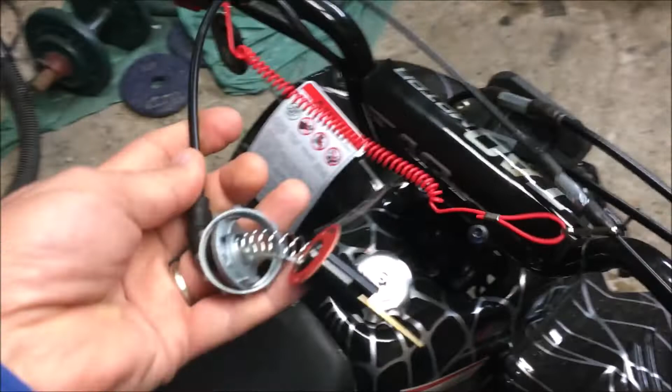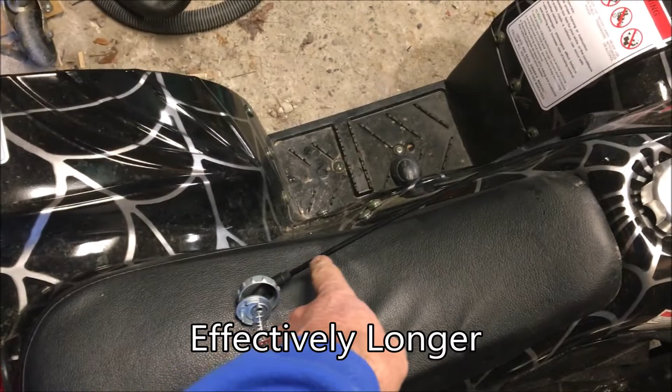Okay, so new direction on the throttle cable. We are going to lengthen this cable, the original cable. We're going to lengthen the inside part, the effective inside part of the cable. So we're going to basically decrease the length of the sheath, right? And so the inside cable will remain the same length, therefore it will be slightly longer. Okay, so that's what we're going to do.

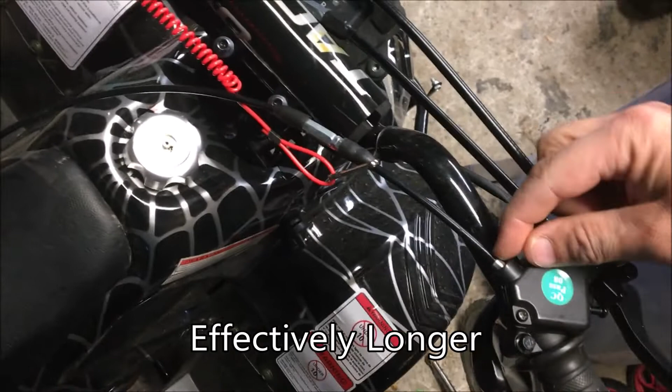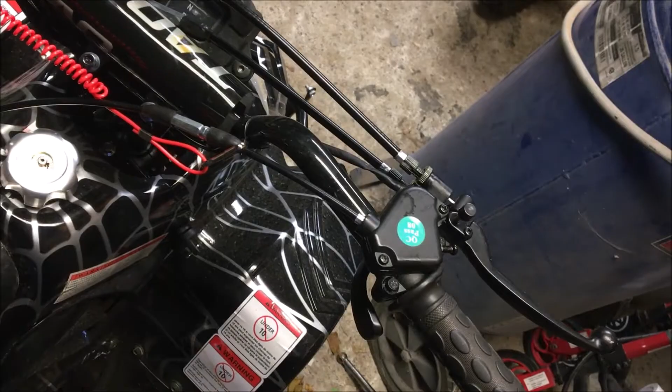And we'll do that over here. We'll cut off the ball on this side, and then we'll have to remake that ball. So we'll just cut a little bit of the sheathing. We're going to see how much adjustment we have here, and we're going to lengthen it about half the length of the adjustment that we have. Okay, that's what we're going to do. That's going to be my rule of thumb.

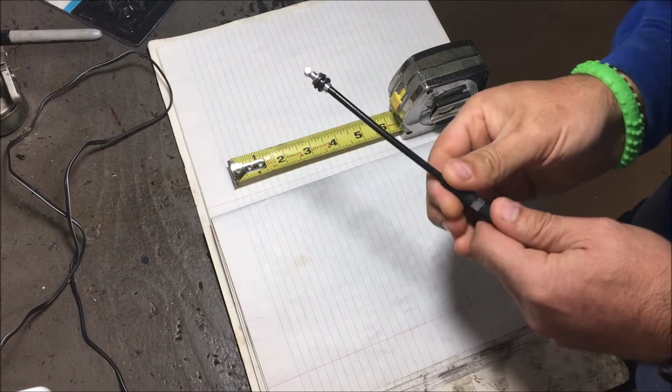Okay, so this is what I mean about lengthening the cable. You have the cable here, we have your adjustment here, which is your only adjustment on the cable. So you go like this and you can adjust the cable, right? You unscrew it, then you double nut it, you lock it there, and that's the adjustment.

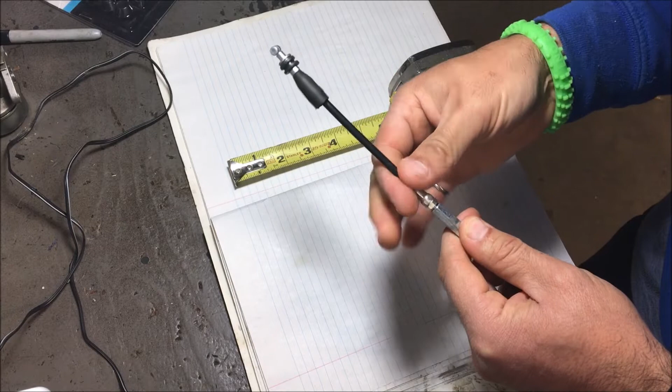So here we pull this out and we can see how long it is. We want this longer because right now it's pulling up the throttle. So right now it is, we'll measure it.

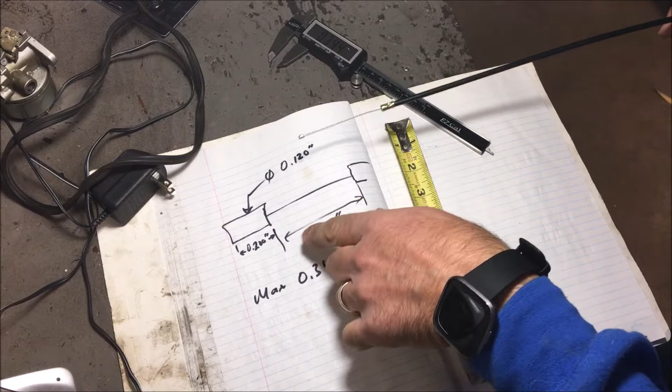So we have the little piece here, and basically its diameter is 120 thou. The length of it is 200 thou, right? Then there's the cable part, which is actually 3 inches, 3.3 inches basically, right?

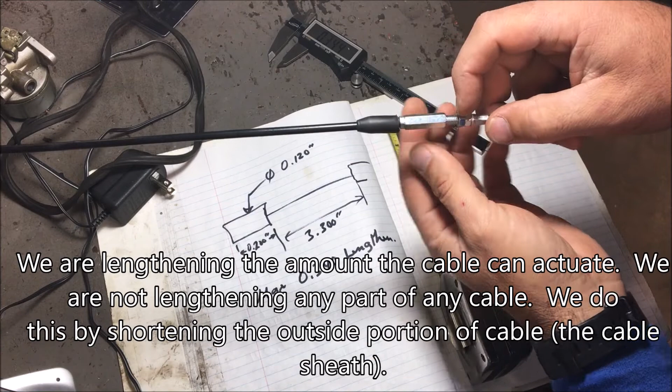From there to there, and we are going to lengthen, as I said. So this is your adjustment here. I backed it off as much as I want to back it off. So if I were to bring it to 0 once I lengthen it, I would just back it off to this point here and then just lock it, and then I'd be at the same point where I am, right? But now, then I have all this adjustment, right?

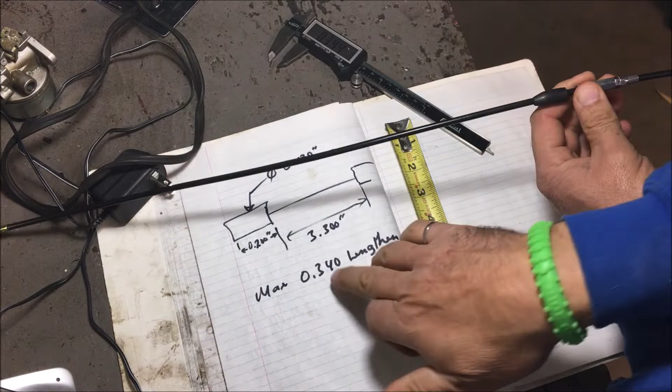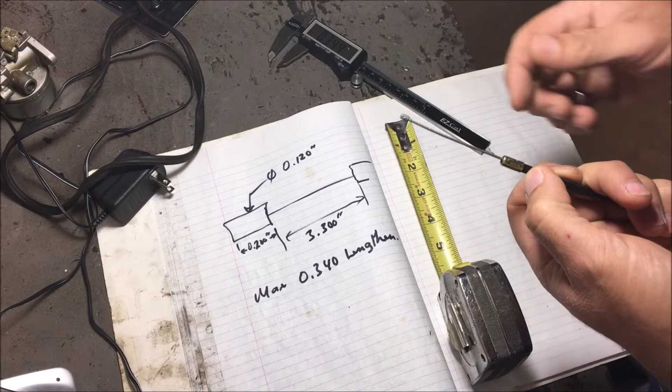See, I'm screwing that in to make it actually longer by, let's go 340 thou. Right, so to do that, we're gonna cut 340 thou from here. Obviously we don't want to cut this. Oh, we have to also include this piece here. So we have to cut 340 plus the 0.2, which is basically half an inch, right, basically 0.54 inches. From here, we gotta first remove this. So first step, remove this. Let's do that.

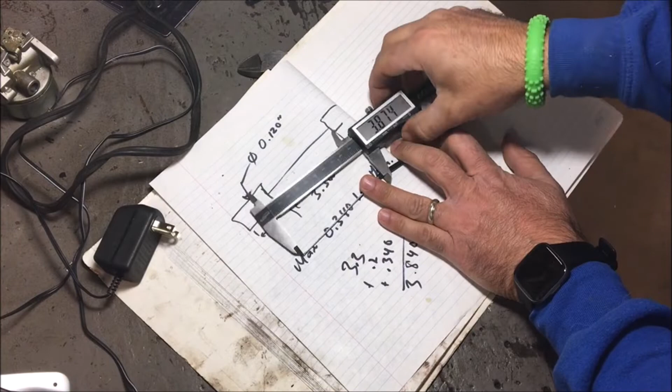So we should get 3.84. We got that. Good enough, good enough. Okay, all we gotta do now is recreate the little bulb there.

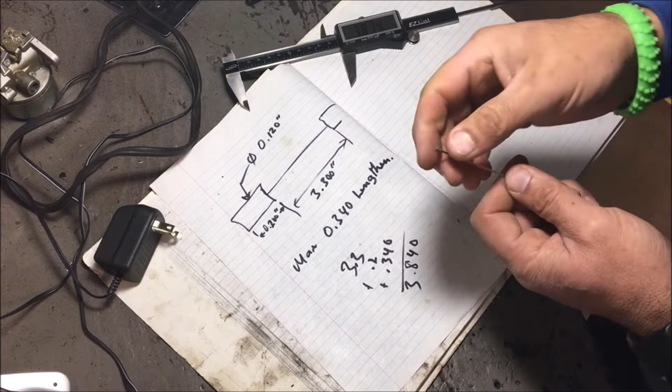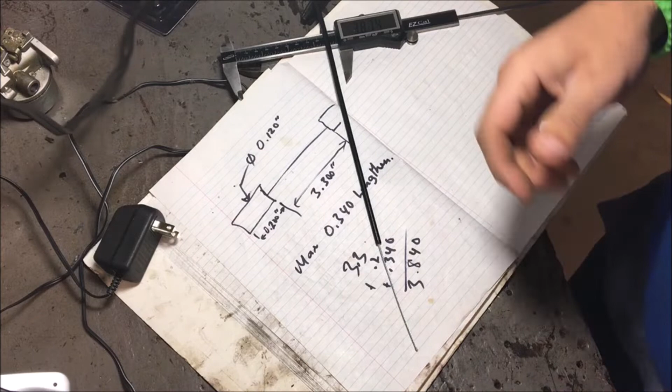So we're gonna use solder, lead, the good stuff, and we're gonna create a little nib. That's simple, that's it, and then we'll be done. So we'll heat up the soldering iron, and we'll just dab it on, and then we'll have to put on a respirator and send it to the grinder and just grind away into a roundness.

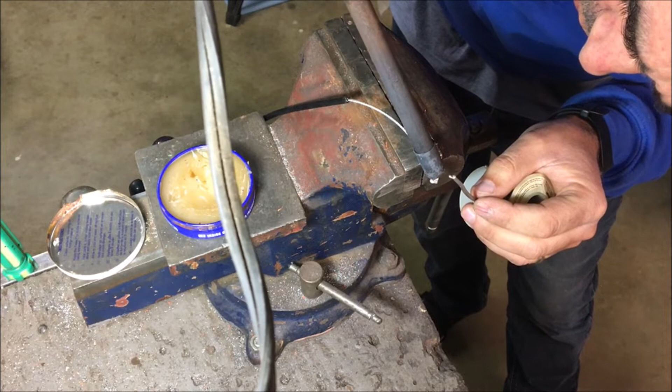Okay, you gotta get right in there and just build it up. Know where your heat is, because if you apply a little bit too much heat it's just gonna all collapse. Oh yeah, oh yeah, there you go. That's a nice good build up.

I'm gonna rotate it a little bit more and continue on. Maybe on this side, maybe just right here a little bit. We're gonna have to do it. Ooh, watch where you put this. Ooh boy, that really catches stuff on fire. Okay, there you go, that's it. That's all you need, right?

And now I'm just gonna take it to the grinder, put on some nice respirator, unplug this electrical iron, right? And I'm just gonna go on the grinder like this, bench grinder, and just rotate it slowly like that, get a nice cylindrical shape, and take it from there.

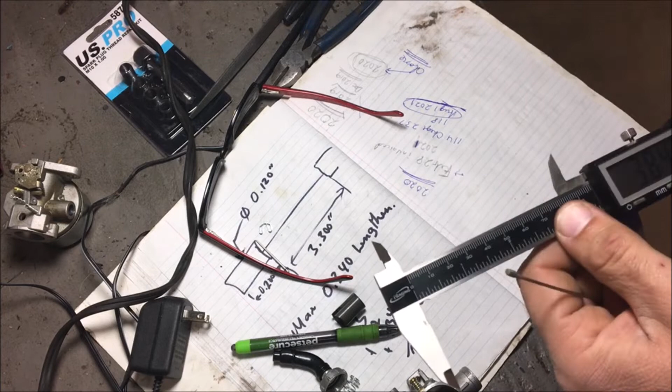Okay, so now we're back at the garage. And let's see how it fits on the real carburetor. These are the parts. Let's put them in here. I need 2 hands for this. But anyways, let's dig in.

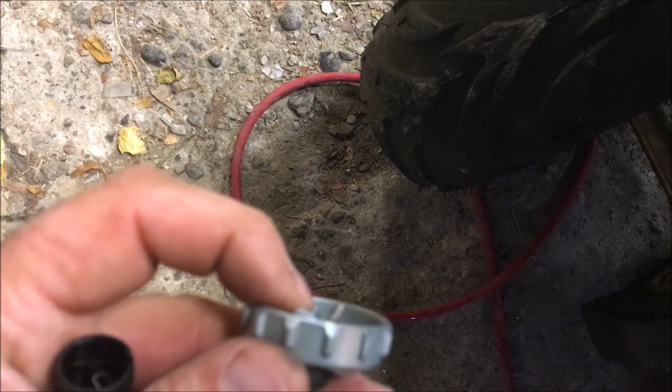Okay, so you're pointing at the ground, but you have to make that little nib small because it has to come through here, right? And there you go. There's the cable. The cable's gonna go there. And yeah, it doesn't have a fancy, nice metallic end now, but nobody really needs that.

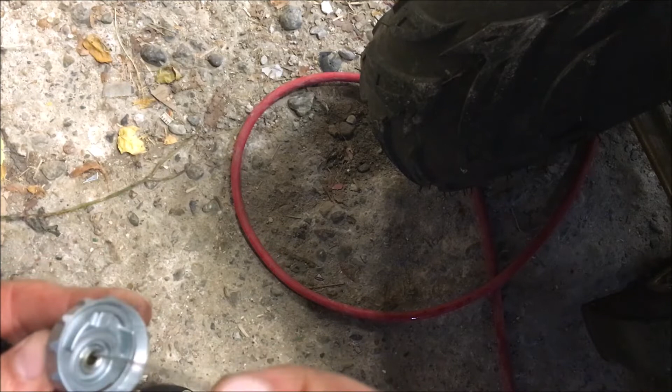Never did need it. You have a washer here. Put the washer on, right orientation, right? Or a gasket, not washer, sorry. Then we have your slide, carburetor slide. So this happens to be one of the cheapest ones I've ever seen in my life.

But, oh, let me just push this down. Crap, okay, let me just push that gizmo down. Okay, we're back, I just had to push the little clip down there and lock it in there.

Okay, so now we're just gonna put this on, and we just do it like this, spring on, right? Spring on, pull it like that. And I say this is the crappiest or cheapest carb because the jet needle, this guy here, has just one groove in it, so there's no adjustment in it.

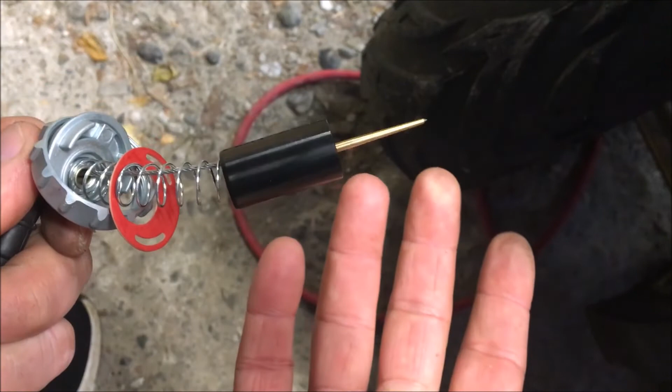Anyway, so you just put this like that, and it is nice and flat there, beautiful, and you just drop the spring in there. Now we have fixed. Okay, fix them up, nice.

But we got some play here, which is what we needed, right? We needed that play, and we're gonna pinch off the throttle anyways, right? This is for kids, and you're pretty much gonna throttle it down. George wants it throttled right down, but pretty much there you go. So there you go, at least now you can feel that you have your play, so your carburetor is not going to be open when you're doing this, right?

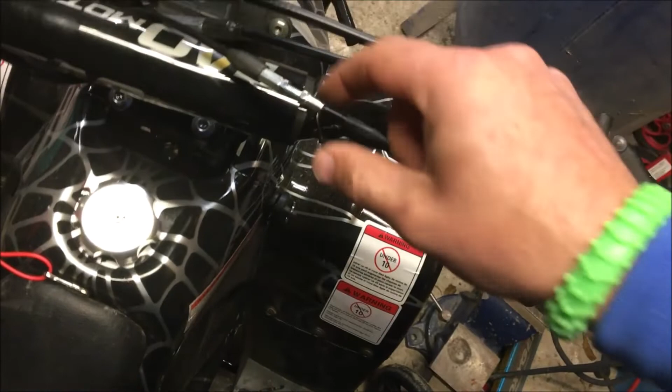So we're good, we're good. We are good. The throttle cable is good. That's it, better than before.